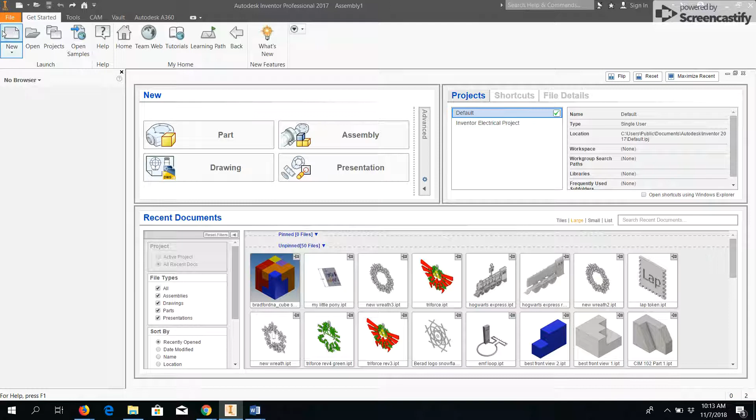So to get started, we will create a new file. And this time we want a standard IAM assembly file. So I'll open that up. And then we need to pull in our part files. Now I usually do that one at a time. To pull in a part file, you use this command here, the place command.

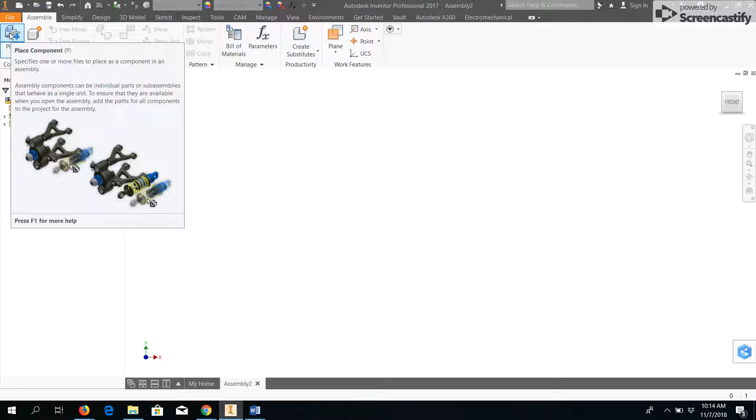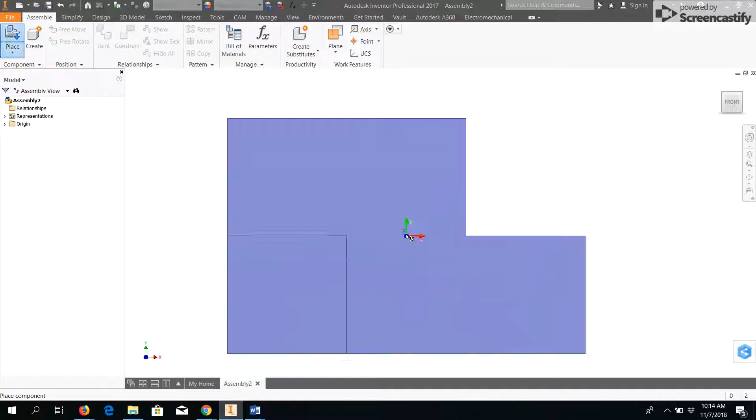And so I will click on that, and that will go straight into the folder with my puzzle cube parts, because this was the last folder I had open in Inventor. If it doesn't go straight to the folder that you have your part files in, then you would search for it here as usual. It should be in your iDrive. So I'm going to start by pulling in the blue piece. It doesn't really matter which one you open, but you'll just choose a piece and left click to place it in there.

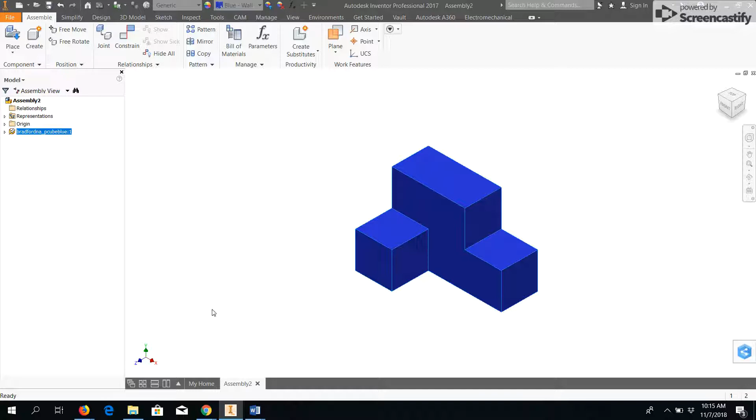Now for the first piece and the first piece only, you want to ground it. So to ground that first piece, you're going to right click on it and choose grounded. That anchors this part down and gives you basically one piece that's anchored for you to attach all your other pieces to. So now that I have that inserted and anchored, I'm going to place a second piece, which for me is going to be the orange piece. Again, I'm just picking this because looking at my solution, I know these two pieces touch each other. And so it's a logical second one to do.

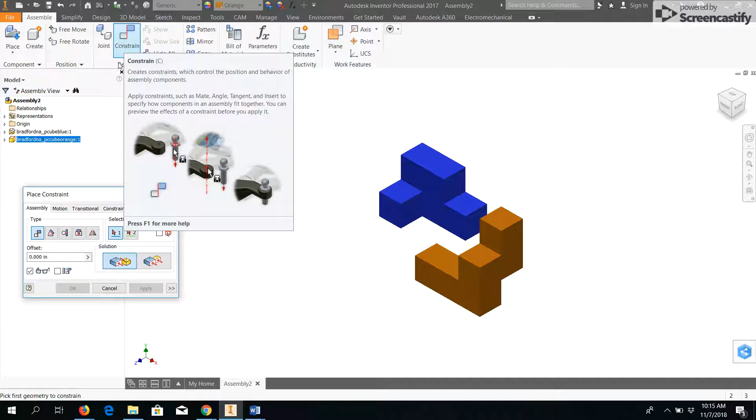So at this point, since blue is anchored, if I try to drag it and move it around, I can't, but the orange I can still move around freely. For the cube, there are basically just two commands that we need to build this assembly, since it's such simple parts and they're all square. So to connect them, you're going to use this constrain command. Once again, if you hover over, it gives you a help menu. There are lots of different options. There are different types of constraints and different subtypes within that. But for this, we are going to only need the one that uses faces.

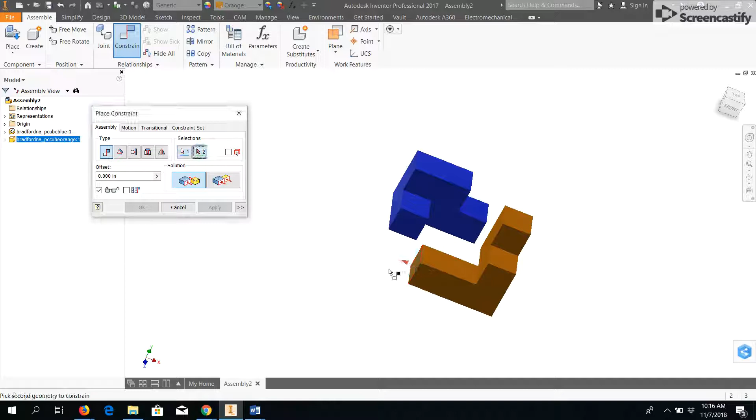So this first command here, what it calls a mate, what that is doing is it is connecting faces. It's using constraints based on the faces of the object. There are two solutions. One is the mate, and that basically glues the two faces together. So if I were to do that, say that face and that face, you can see it brings the two faces and sticks them together.

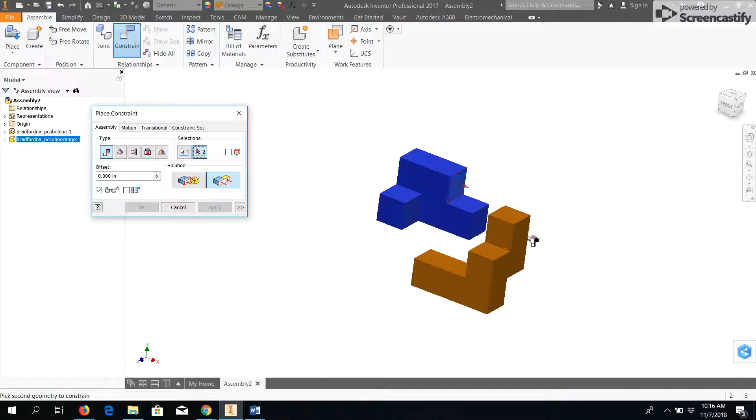The other face constraint, which again this calls mate, is the flush. And that will pull the two faces side by side. So I've got the flush right there. I do that with this and this, you can see that now the one part's going through the other, but these two faces that I selected are flat with each other. They're level with each other. Now, neither one of those is the way I actually want this part arranged.

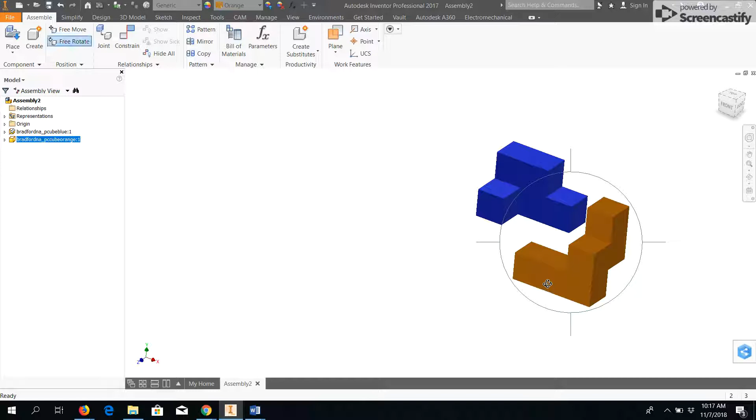So I'm going to go ahead and try to attach this the way I want. Now, one option is to use the free rotate and the free move to kind of position your part close to the way you want it. So I kind of want my part like this, and it's going to be sitting up there like that. And so that kind of gets it into position close so that it's easier for me to see which faces I need to click on to make this thing attached. But I don't actually have to do that. I'll come back to that in a second.

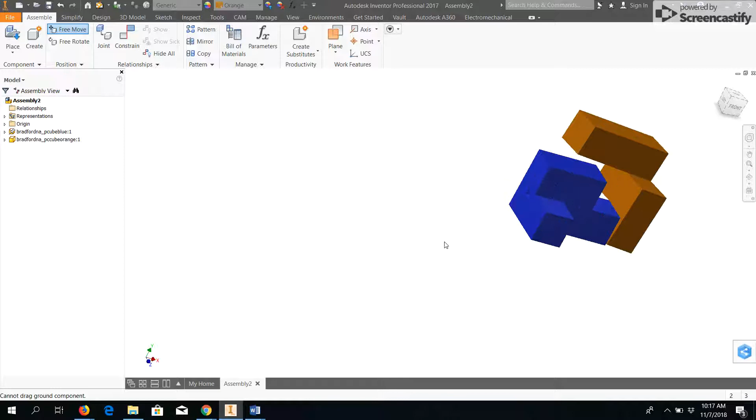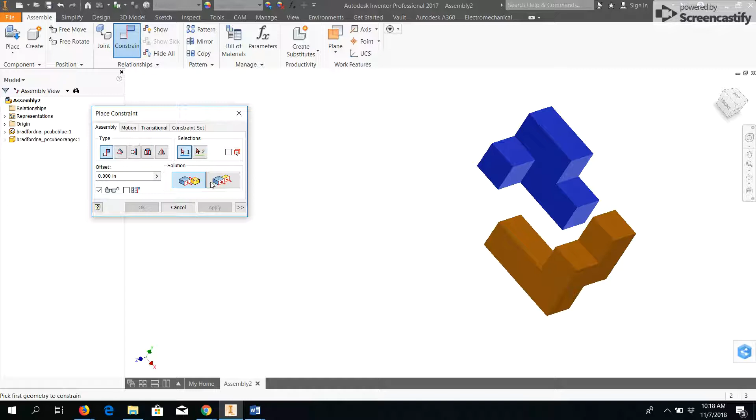So I could go ahead now that I can see pretty well what I need to do. I know that I want this mated to that, and that's kind of set. And then I'd hit apply. Now I'm going to undo that and just show you that while it's helpful to get it rotated around, you don't have to do it. Usually the way I do it is I can see that I need this face here glued to that face there. And so I just simply do it here and then here, and it rotates the part around for me. So if you can visualize it, that's probably the better way to do it.

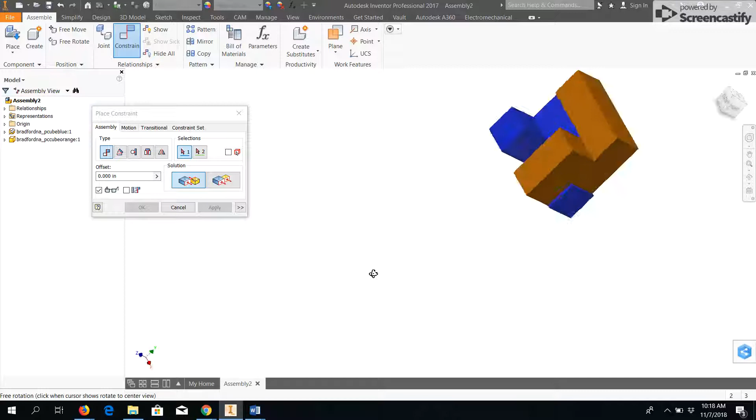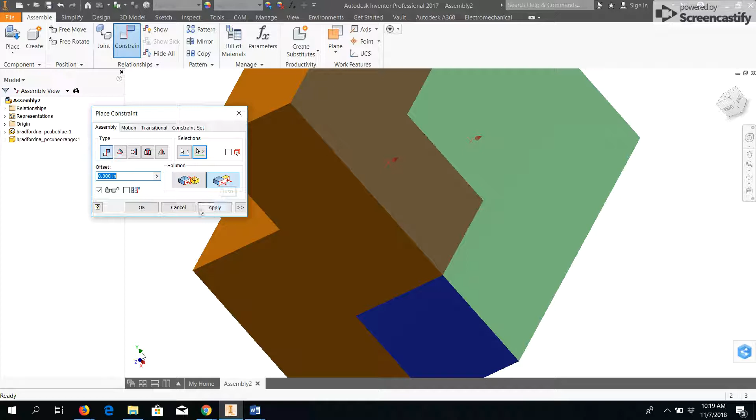If you can't visualize it, go ahead and use a free move and free rotate to get the part close and then constrain it. I'm going to hit apply on that. And now I know I want these two faces flat with each other. So I'm going to switch over to the flush and I'm going to hit both of those and it'll pull them in flat. Hit apply. And I look around and I can see I want these two faces back here flat with each other. And so I'm going to do another flush right there and hit apply. And now that is fully constrained.

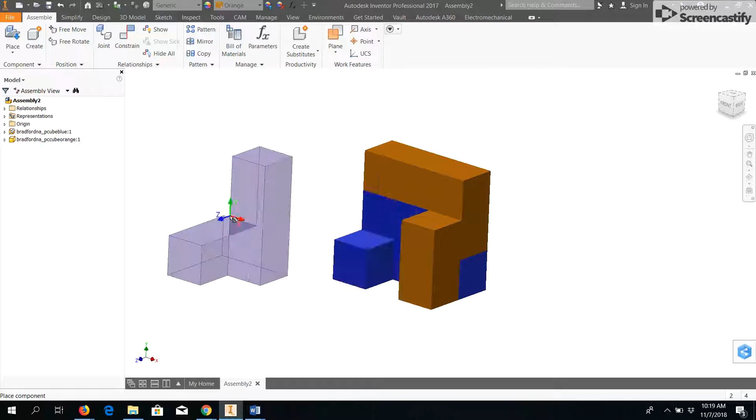If I hit cancel here, since the blue is grounded and the orange is fully constrained to it, if I try to grab it and pull it, it won't move off. Okay, so you would just continue this with each of your additional pieces. After you finish one, you'd go to place and you could pull in another piece and continue on with this pattern. When you're completely done with your assembly, you'll want to save that. And once again, make sure you save it in the same folder with all your part files.